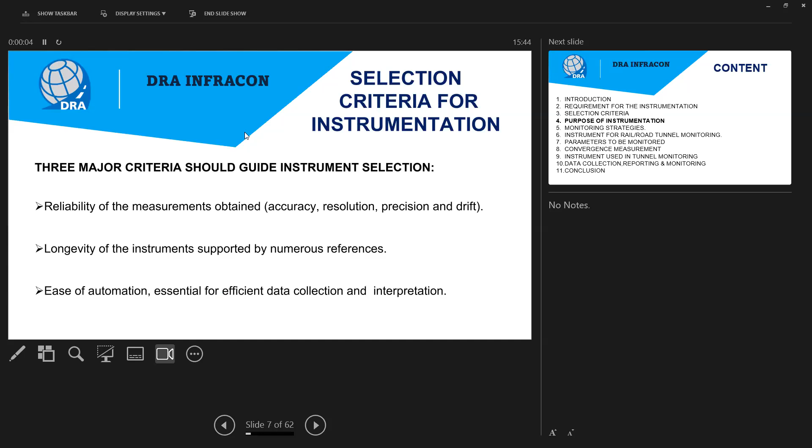So why do we require instrumentation, and where did we start with instrumentation? If you go to the earlier part of tunnel construction, there was very little instrumentation installed. As you are aware, before that, in India, as Madam said earlier, the transition point or watershed moment of tunnel construction, particularly in transport tunnels, was the construction of the Chenani Nashri Tunnel.

There were 3 projects awarded at a time in India, and these 3 were having almost the same length. The Chenani Nashri is 9.2 km, the Rohtang is about 8.9 km, and the Kazigund Banihal is around 8.5 km. All these 3 tunnels were awarded more or less in 2009-10, and the first tunnel completed was Chenani Nashri in 2017. Subsequently, Rohtang tunnel in 2021, and Kazigund Banihal in 2022.

When we started tunneling, there was a concept in the mind of planners that the tunnel is a very, very expensive and costly structure. At one point, the minister said during the breakthrough of the Chenani Nashri tunnel that at 200 crore per kilometer, you construct one kilometer of tunnel, but in 200 crore I can construct 10 kilometers of highway. So it's very expensive, the country would not afford it. But then I explained that the tunnel is a safe construction.

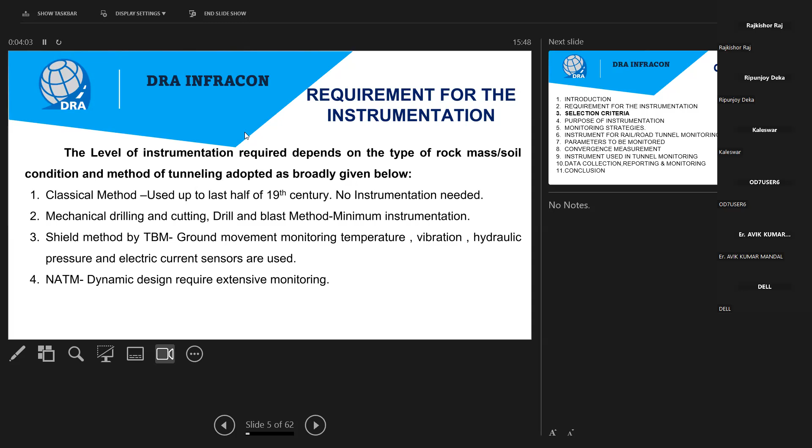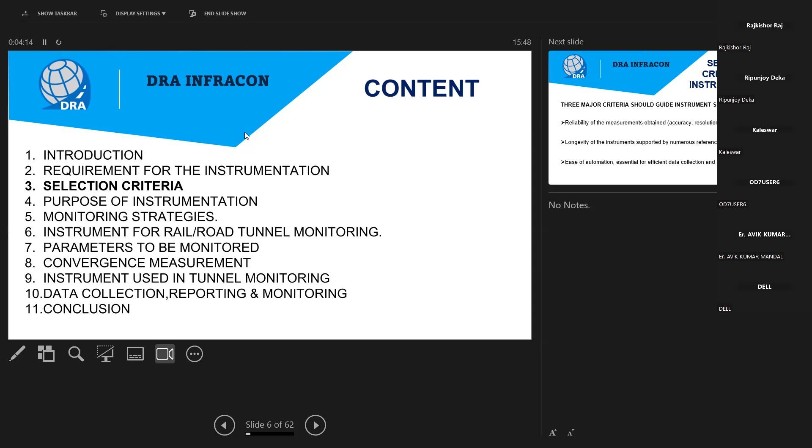Excuse me, sir, sorry to interrupt. Sir, am I audible? Sir, it's not in presenter view, can you switch to presenter view? The slides are also not moving. First right click on the screen, then slideshow, then right click again. Just a minute, the screen is not visible. What to do? It is in present mode. Yes sir, now right click on the screen. Yeah, hide presenter view, there's an option, hide presenter. Okay, oh now it's full screen? Yeah, now it's fully visible. Okay.

So, coming back to the discussion I was having about the watershed moment in India for tunneling. In 2017, the ministry started thinking about a lot of tunnels. Presently, almost 1,000 kilometers of tunneling is either under planning, implementation, or bidding. Now, tunneling is considered as usual construction, just like a flyover or an elevated corridor in road projects, particularly in road and railway projects.

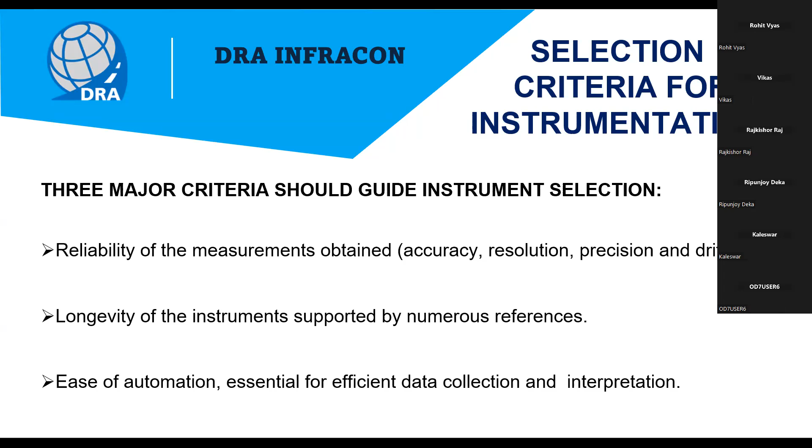As I said, automation is now becoming part and parcel of today's tunnel monitoring. Most tunnels in India now have inbuilt provisions in the contract for real-time monitoring on handheld devices, particularly mobile phones or laptops. What is the purpose of the instrumentation?

NATM design is a dynamic design process, wherein as you progress, you modify your design. As you see the tunnel, you improve your design based on certain criteria given by the designer, based on the ground support you are getting. Initially you just predict, but you correlate your prediction with actual ground reality, and accordingly manage your support system. Based on the support system, you also monitor the various stresses or convergences encountered in the tunnel while executing the underground structure.

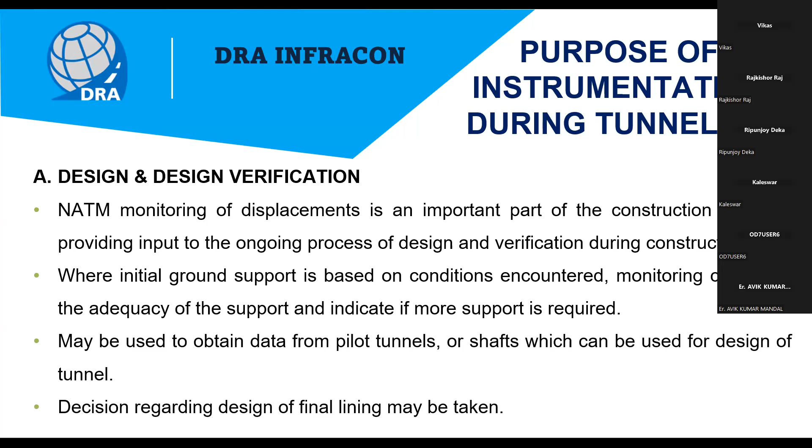So first is design verification. During construction, it helps you diagnose where your weaknesses are and where additional support is needed. We will subsequently see how we plot the monitoring or convergence data, and then see how we quickly correlate what is going to happen and how we control it.

A small monitoring failure can lead to a catastrophic event, just like we had some time ago in one of our projects in Uttarakhand, the Silkyara tunnel, wherein they were aware that the convergence limits were exceeding, but still they continued with the correction in the cross section, and it ultimately led to catastrophic failure.

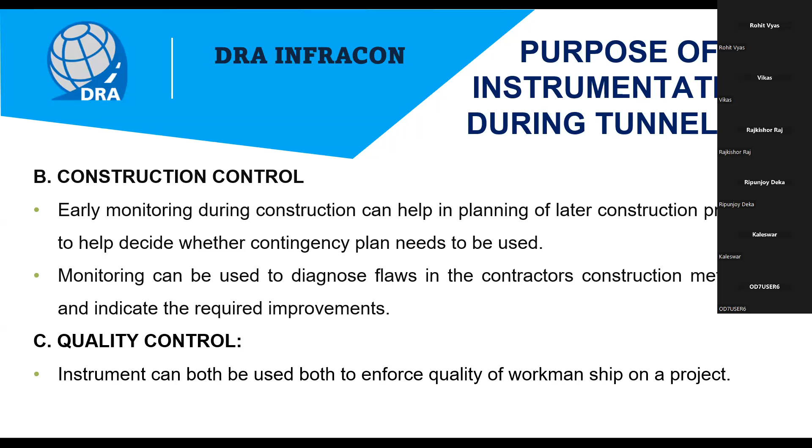People were trapped in the excavated tunnel. The other purpose of tunnel monitoring instrumentation is quality control, wherein you can assure that whatever rock bolts, shotcrete, or support system you have installed, or the lining or reinforcement, is according to requirement or not. So that quality control can also be taken care of. Safety, of course, as I said, is the main reason for providing more instrumentation in the tunnel.

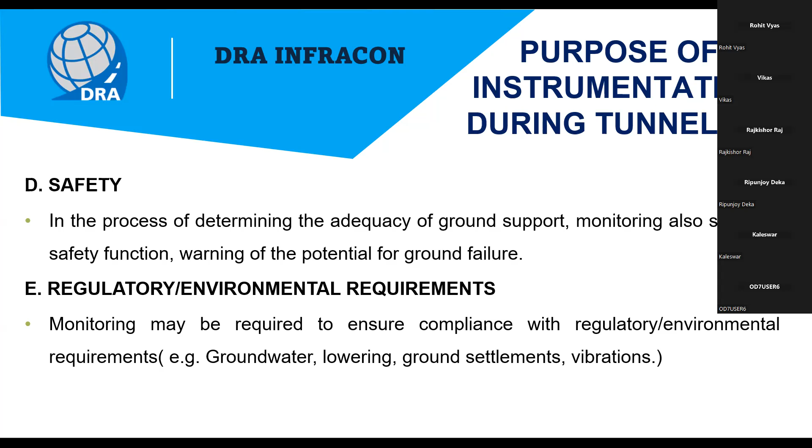Apart from that, there are regulatory requirements. In many projects where there was low cover and a population sitting at the top of the hill, when the tunneling agency was executing the work, they started reporting challenges, cracks in their buildings, and other problems. Their animals were scared. So in that case, regulatory authorities now make it compulsory that wherever there is urban population at the top, you have to have certain instrumentation, particularly measuring deflection or vibration at the top of the hill.

Now, performance: whatever you are doing, whether it is performing as per expectation or not. You install the instrumentation, record it, and check whether the support system you have provided is sufficient or not, or whatever corrective measures are to be taken.

As I said, legal protection: in one of the projects we had the data, and we made it available to the honorable court, showing that the cracks at the top of the tunnel were not because of failure of the slopes, but because of other reasons. We gave them the data; we had installed inclinometers and such at the slope of the open cut.

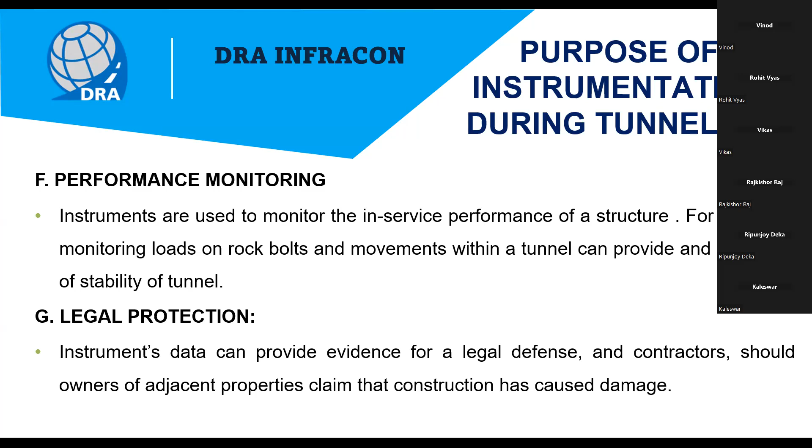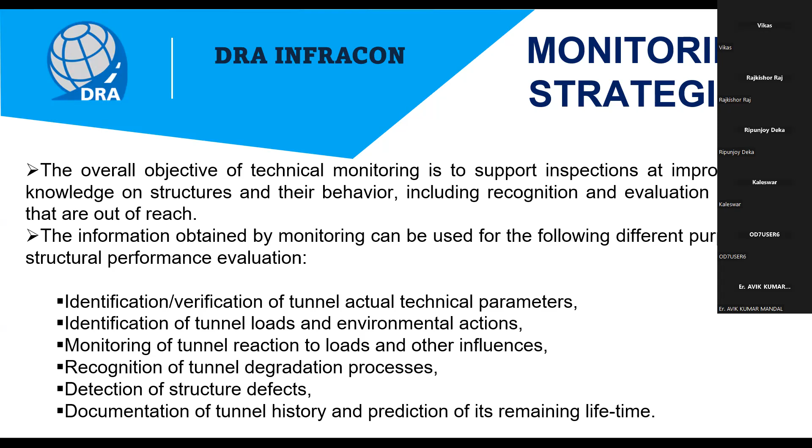Unfortunately, another issue I am pursuing with the government on various platforms is that we do not keep a repository for every tunnel. If we had the repository of the tunnel, we would probably not require much investigation if constructing any tunnel parallel to that or any tunnel in that region. For example, we requested the government to create a repository for the Chenani Nashri tunnel. They did not create it, and that data is available only in hard copies at the project site. Now they have invited a parallel tunnel to the Chenani Nashri tunnel, and while inviting that, they appointed a new consultant who carried out all the pre-bid investigations. The government unnecessarily spent a lot, and still he is predicting something that could have easily been assessed from what was encountered in the past in the previous tunnel excavation.

So that's the thing. Now, what are the typical instrumentation schemes of a NATM tunnel? We will talk about NATM tunnels more largely. My experience is basically in NATM tunnels in the Himalaya as well as non-Himalaya regions, so I'll talk more about NATM and whatever equipment is required for NATM tunnels.

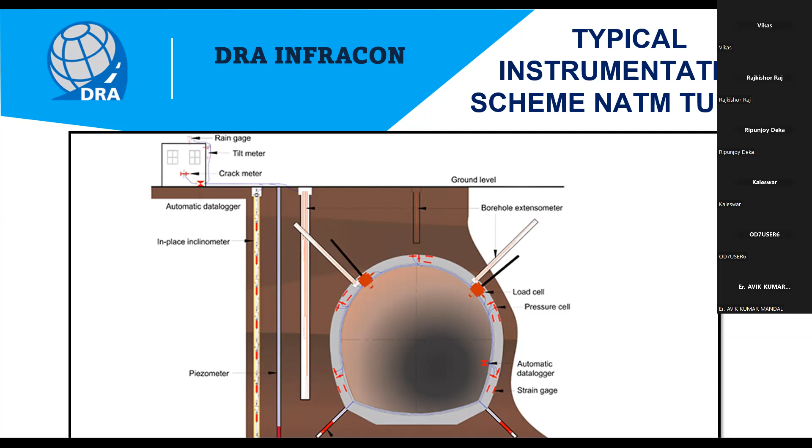So this is a typical diagram showing most of the equipment that is used to be installed in the tunnel. We'll talk one by one about the tunnel instrumentation.

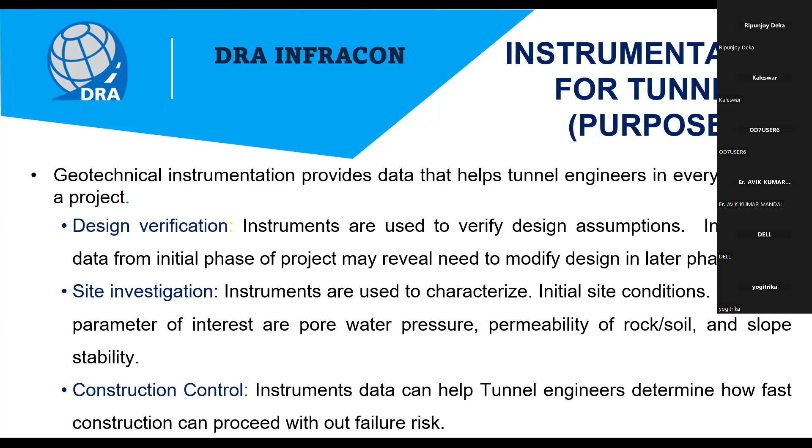Construction control, of course, is the basic purpose.

Now, what are the different components that need to be monitored for an underground structure? First is the portal, whether it's the portal of the adit or the main underground structure. Portal is the outside portion, the slope cut portion, the open cut portion. So that is the first thing we used to monitor. In India, based on my experience and the number of failures I have evaluated out of my inquisitiveness to know about the failures, more or less 70 to 80% of failures in tunnels are at the portal itself. It is the most ignored part of tunnel engineering, and at portals generally people used to install as little instrumentation as possible. But these days, wherever I'm constructing a tunnel, I'm putting maximum instrumentation on the tunnel portals.

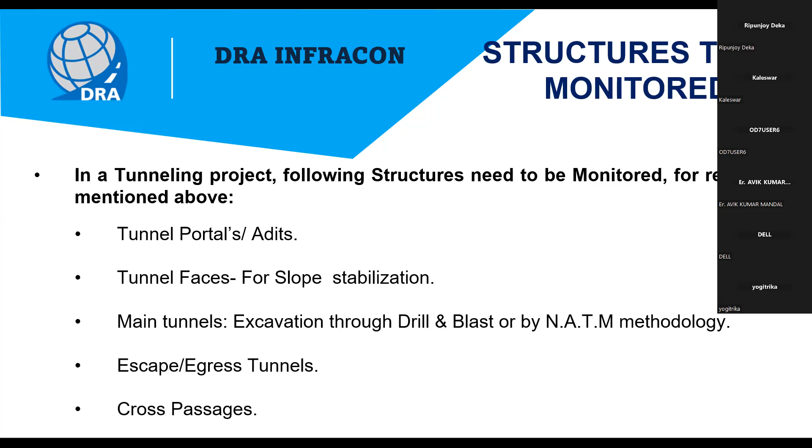Second, we used to monitor the face. The slope stabilization techniques are to be decided based on the instrumentation done on the face. Next, the tunnel needs to be monitored longitudinally as well as along the cross section, and different instrumentation is required particularly in the main tunnel section, and then the escape egress tunnel, and of course the cross passages.

Closure or convergence is a very important parameter, because NATM is a progress-based tunneling design method wherein you anticipate the least support and then subsequently allow some convergence, and thereafter, based on the convergence data, you improve upon or increase the support to restrict the convergence.

Similarly, rock ground pressure on the support, whatever pressure is coming, requires instrumentation to measure it. Also, radial movement of the rocks within the tunnel or outside the tunnel around the support.

Pore water pressure is important because we've seen many failures, particularly the classical failure of the Rohtang tunnel, wherein Seri Nala could not be properly judged, and there was a puncture in the aquifer with lot of water ingress in the tunnel, and the tunnel remained closed for more than a year and a half.

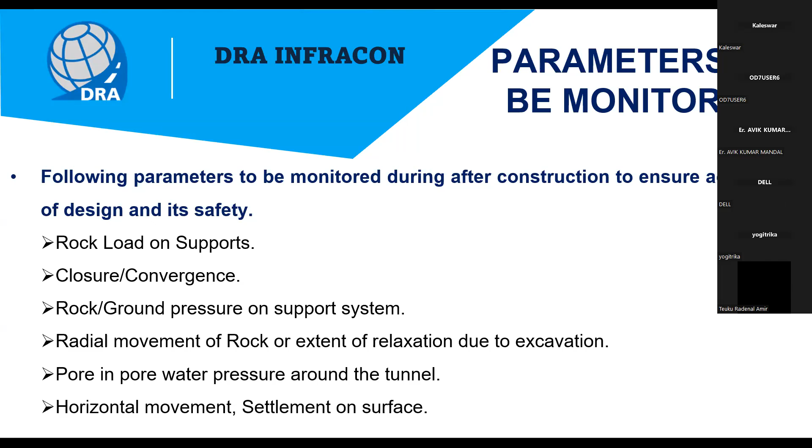So pore water pressure needs to be monitored, and then horizontal movement of the tunnel or the settlement of the support.

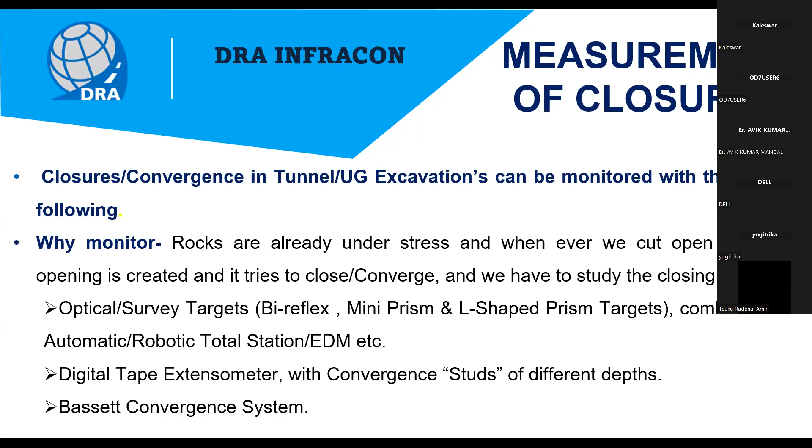Now we'll go through how the convergence is measured and how it is represented, why to monitor it, and what are the instrumentations involved - we'll see one by one.

The convergence measurement is carried out with the help of targets. Targets are simply a prismatic or non-prismatic bi-reflex type target, mounted on the surface of the tunnel or on the slope of the open excavation, berms or benches, or the face of the rock, wherever you see open rocks. You mount these targets, record the readings, and by combining individual targets, you determine how the convergence profile is changing outside as well as inside the tunnel.

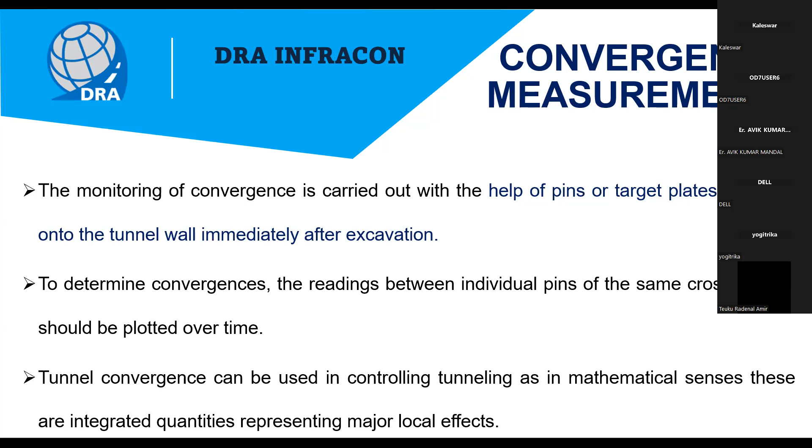Both you plot longitudinally as well as along the circumference or periphery of the tunnel. Stress-strain curvatures differential with respect to time are also noted.

The convergence calculation is simple: C(t) equals D0 minus D(t). The reading noted initially while installing the support, and the reading noted at any given point of time - the difference of that is convergence, and this convergence may be negative or positive.

Positive is always dangerous because it is coming inside. Negative you may sometimes ignore, but you can't ignore it completely.

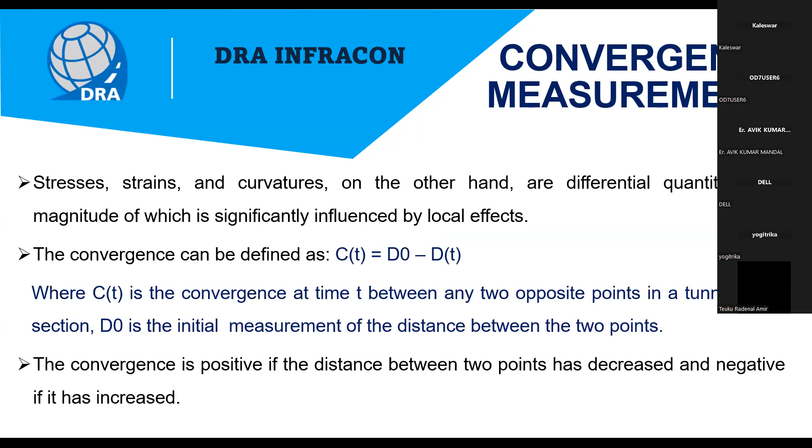Now, displacement history means you monitor over a longer period of time and then plot it. It is not necessary that whatever convergence you are seeing will remain short term - for many other reasons, this convergence at a given point of time may suddenly change.

So monitoring should not stop once you have gone ahead of the tunnel. The classical example is the Silkyara tunnel, wherein the accident happened at a place about 2 kilometers ahead of that particular location.

If the monitoring had continued, probably they would have noticed that there is a major change in the behavior of the convergence, and they could have immediately taken preventive action.

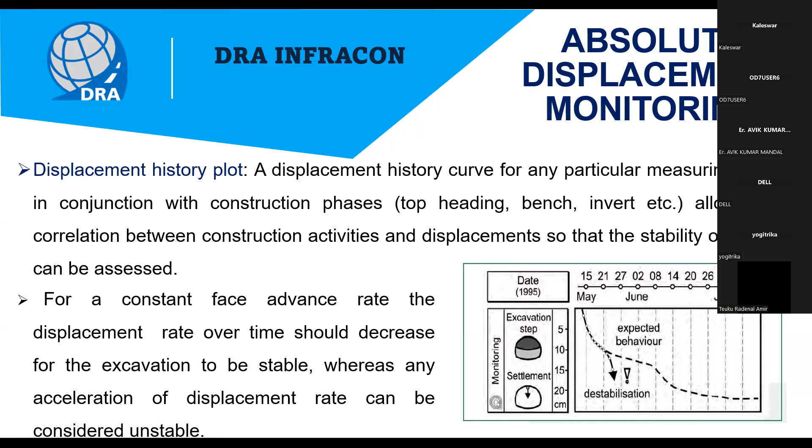So over a period of time there is monitoring, and along the length of the tunnel, we should also plot how the behavior is changing.

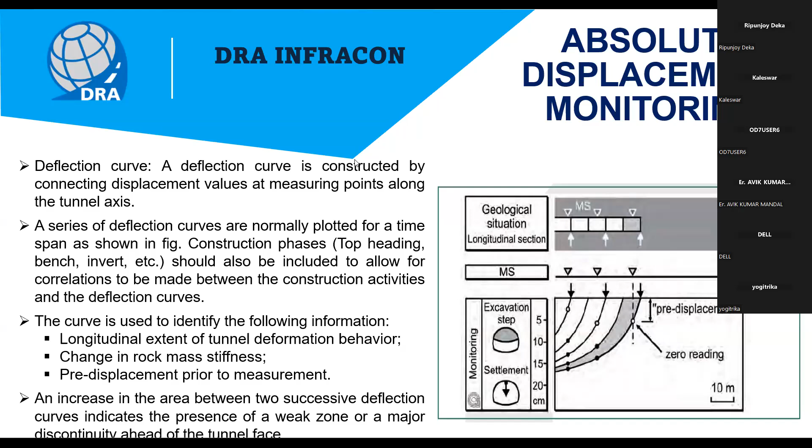For example, you are moving in this direction, but you keep on monitoring at each and every location and then plot it. Now why it is zero reading, because initial displacement is allowed and that is to be ignored.

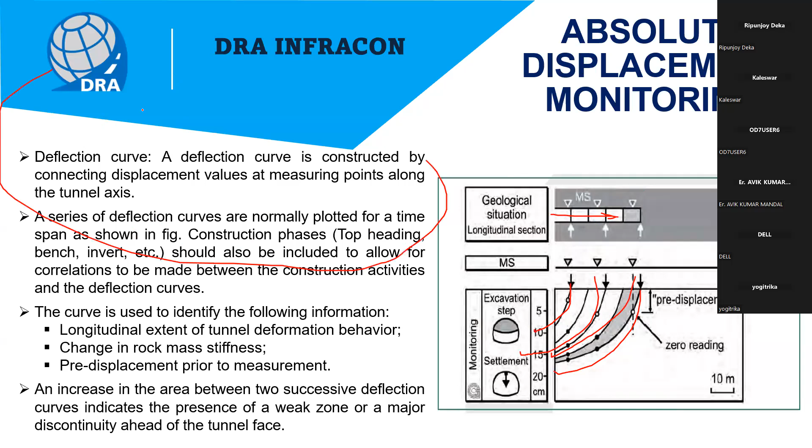So over a period of time along the length, if you measure it and plot it, you will be able to know the longitudinal deformation behavior of the tunnel, how the rock mass stiffness is changing over time, and how pre-displacement measurement prior to support is to be taken care of. This is a very important parameter that needs to be plotted, particularly the deflection curve.

Now, if this deflection curve is plotted with respect to time also, then you will be able to know what kind of geological changes are happening in the tunnel.

For example, if you see a uniform deflection in the tunnel, and suddenly there is an increase in the deflection and it goes back, it means some geological formation or weak strata has been encountered in between your tunnel, which requires additional monitoring.

If you plot it over a period of time and draw the trend curve, then you will be able to know that there is a weak zone and we should take care of that beforehand.

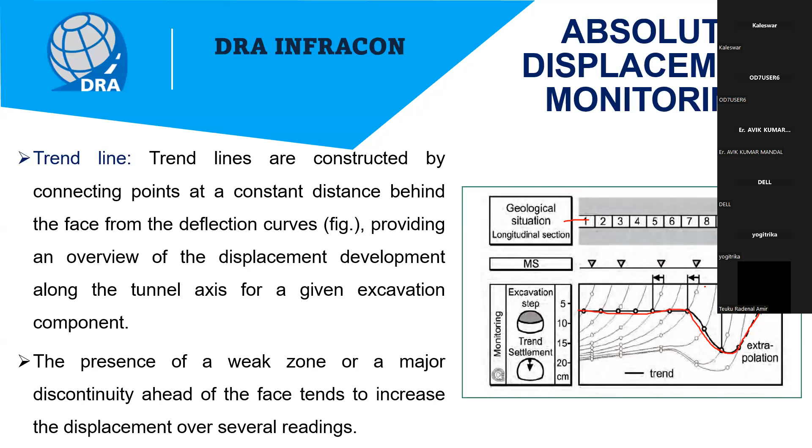Now, frequency of reading - whether we should take it daily, weekly or monthly - depends on the type of strata you are encountering. Otherwise, these days we have general instruments which we put inside the tunnel that take readings on a real-time basis, but it is not necessary that you install that all along.

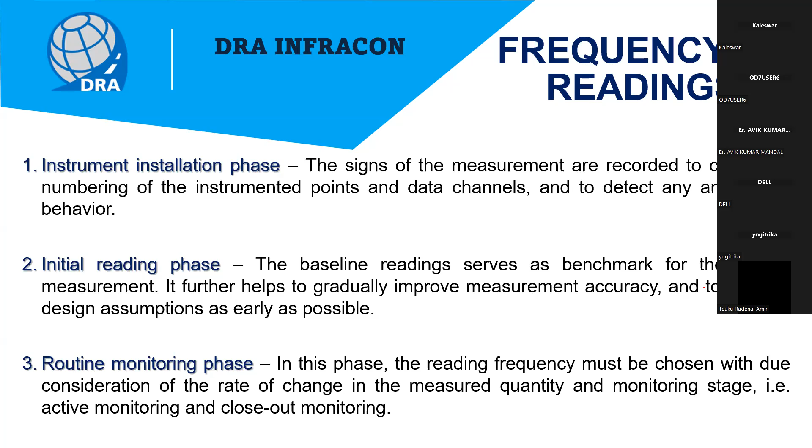So you are still dependent on the optical targets, wherein manual reading is required to be taken, and in that case, the readings are spanned over time.

So I have just drawn various types of instrumentation, along with whether we should take readings on daily basis or at a desired frequency. This frequency depends on many factors, whether you are encountering displacement continuously, the type of strata, or at the time of excavation you got a soft rock, or you have a particular kind of dip or certain geological formation. It all depends on that.

But if you monitor it, it is compulsory to monitor visual observation, displacement, stress, settlement, or the cracks on a daily basis in the entire length. Whether you have constructed a 3 km length, start daily basis from the beginning itself to the end.

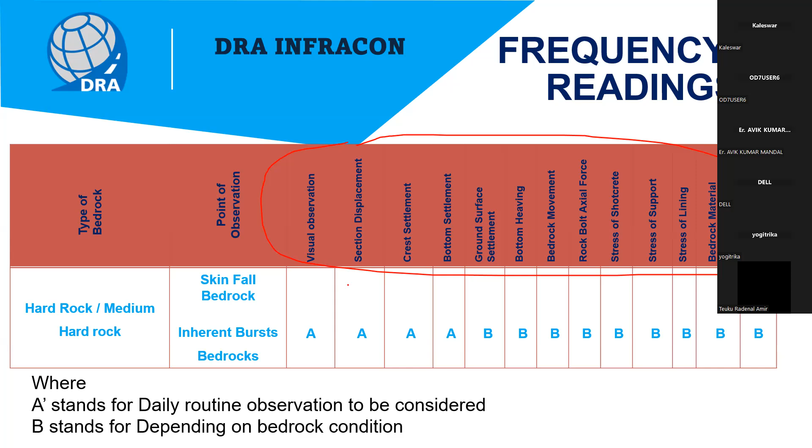Load cells, rock bolt load cells, convergence meter, and the typical earth pressure cells are required in most of the tunnels, along with the prism and the total station.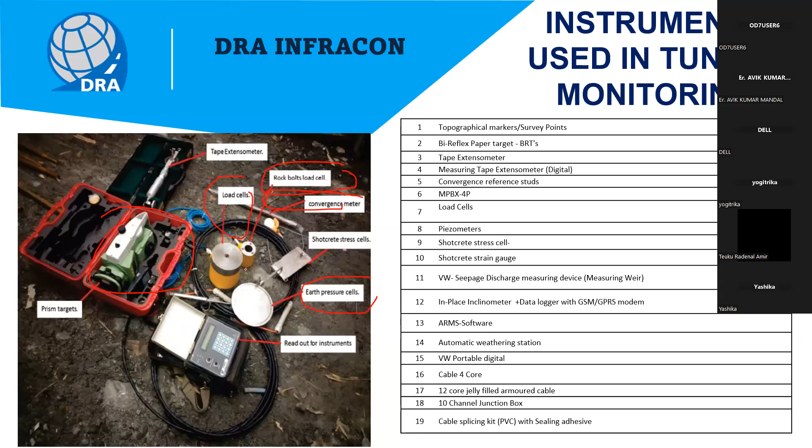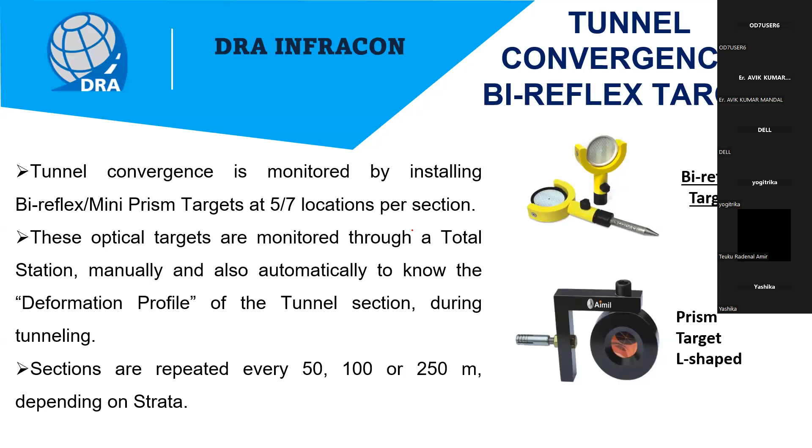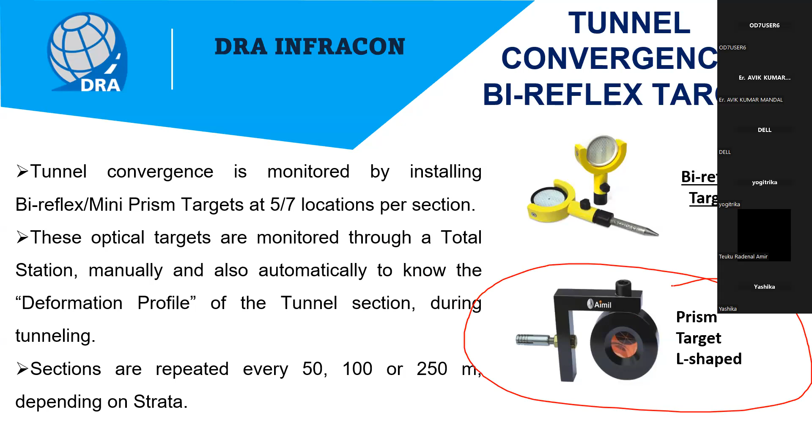So the first and foremost, which is most common, is bireflex targets, which is required in most tunnels. It is along the periphery, maybe at 3 location, 5 location, 7 location, depending on the field engineer who is monitoring the tunnel, depending on the rock class, whether you are providing 5 or 7 or 10. In that category, wherever you need some specialized or cautionary monitoring, or wherever you require intensive monitoring, you provide more specific prismatic type of targets. Very simple. Whether you install 3 or 4 or more number of instrumentation targets, both in heading and benching separately, or heading and benching to a full face together, that depends.

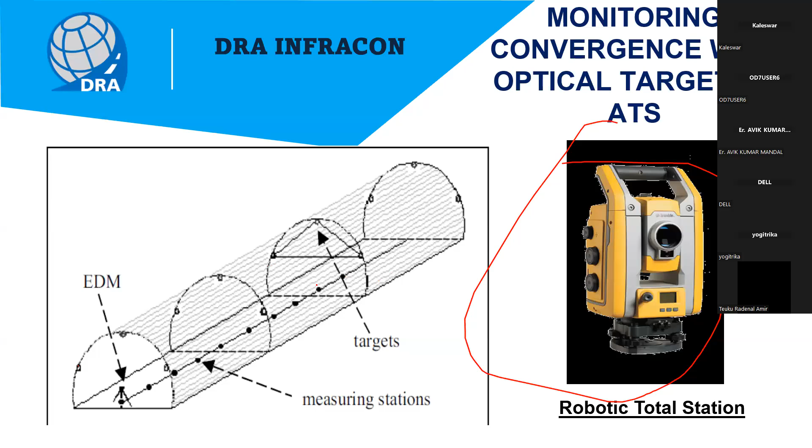And apart from the target, you require a total station and a skilled surveyor who monitors it, and the precision level of these robotic total stations should be very high. Accordingly, you require a very skilled surveyor to monitor all these, to record all the data. And then you present the data in various forms for the different targets, as well as all targets put together in a cumulative way.

So these are the, and there are a lot of softwares which are available these days to plot the target data.

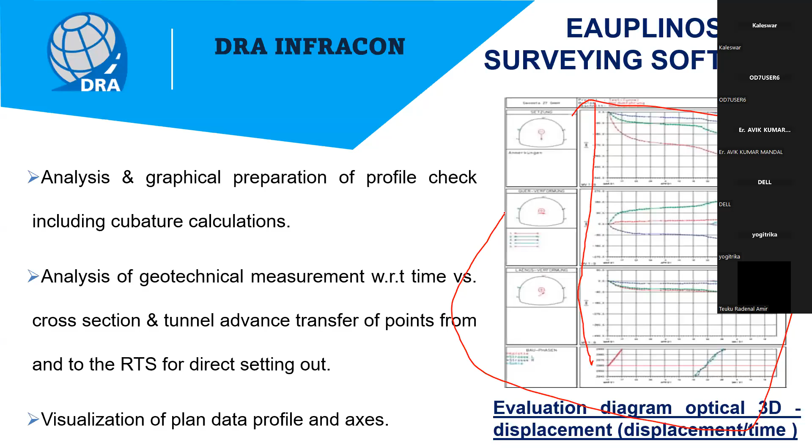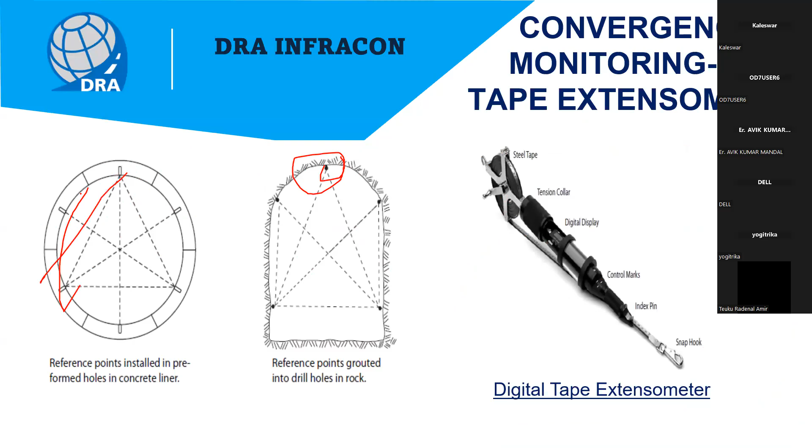Then you come to the next, there is another way to monitor the convergence, which is also very precise. You install the specific points, and then you place the digital tape extensometer all along the periphery in this direction, and then you record what is the change in the reading.

This is another method, the Basett system, wherein you install it in a completed tunnel. Then you measure the spatial data all along the periphery in both X direction as well as Y direction. The entire data that is changing, it is taking place over a period of time.

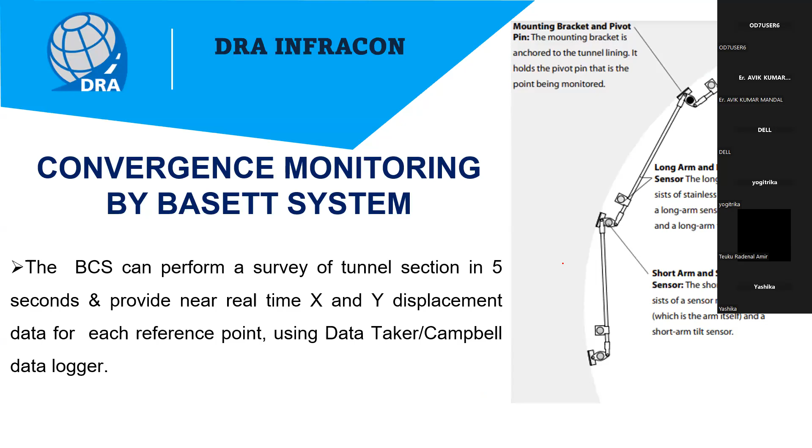And sensors are installed. These are the sensors which are installed. So these sensors record the readings.

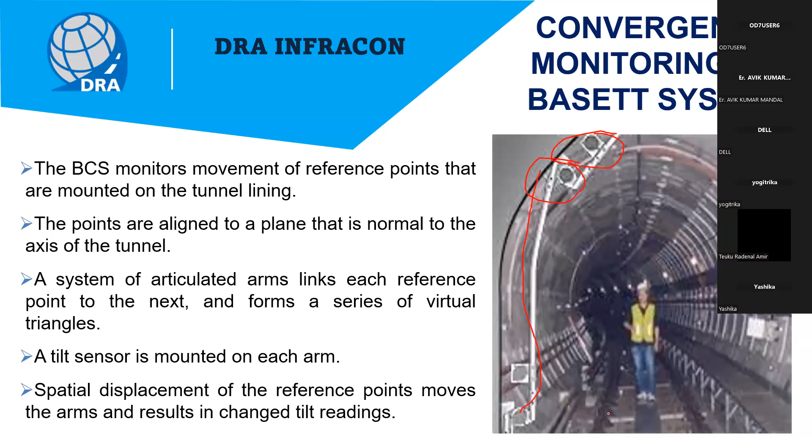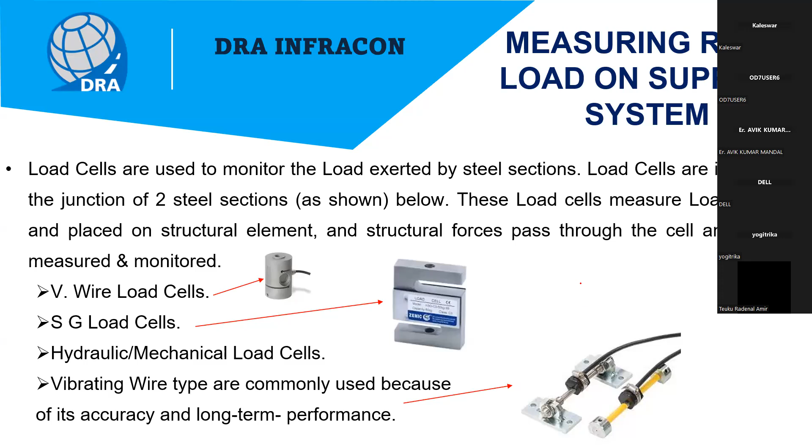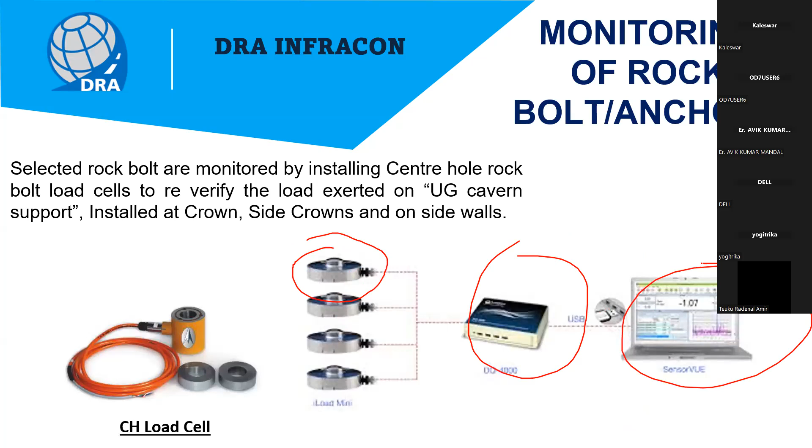Now, there is a type of load cell which is CH type, where you are getting the reading directly on the rock bolt. You install it and then take the reading on the rock bolt. It goes to the handheld reader and then you can plot it on the laptop through a software. Generally, software is provided by the people who are manufacturing the load cells.

Now, another important aspect is measuring the pressure which is coming on the support system, whether shotcrete or in the lining, whatever be the pressure that is coming up, whether it is sustainable or not sustainable. So you provide the radial and tangential stress meters.

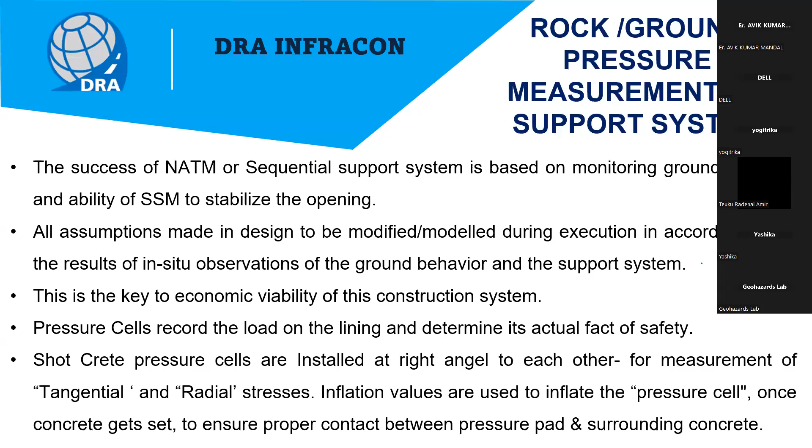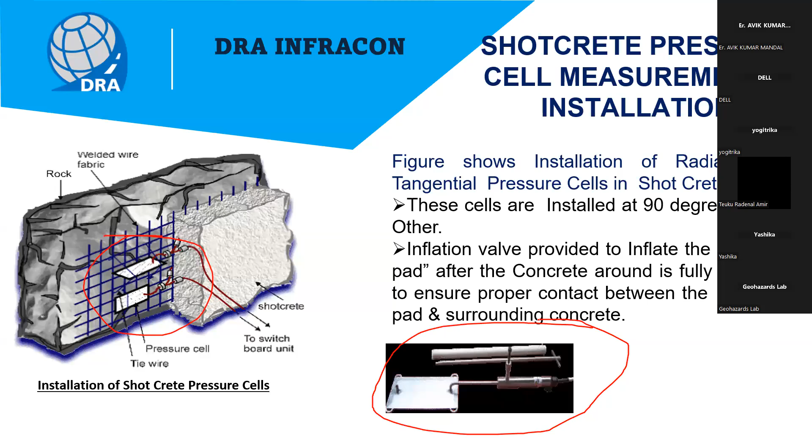These are the radial and tangential stress gauges that have been provided. It looks like this, and accordingly you take the readings and decide whether the shotcrete thickness is sufficient, whether the designs done are adequate, and optimize accordingly. If there is no pressure coming and you are provided 250mm shotcrete, you can reduce it, or if you are provided 2 layers of wire mesh, you can change that - take corrective action and optimize your design based on these readings.

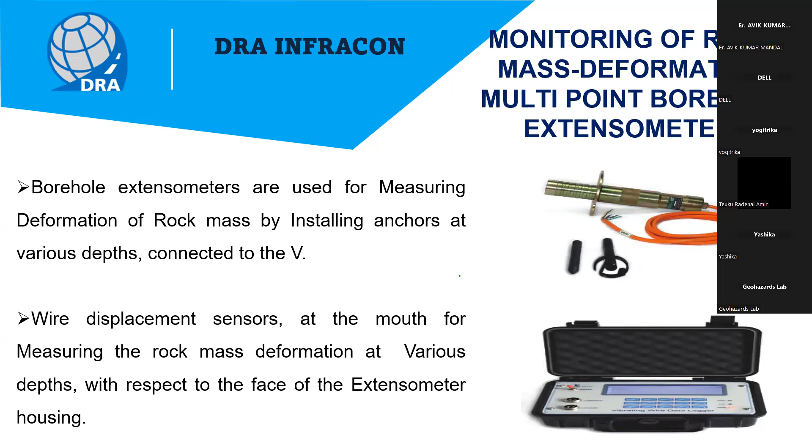So it's quite helpful. Then comes rock mass monitoring. First we saw how rock bolt stresses are monitored, then how support, particularly layered support systems, are taken care of. Now, whatever rock you are encountering, how the rock along its periphery is taking care of the load - that is to be monitored.

Then next is pore water pressure. Same way as you install the load cell, like this hard rock, soft rock monitoring system is installed. Same way you can install the vibrating piezometer to take care of water pressure coming on the ground or inside the rock surrounding your tunnel.

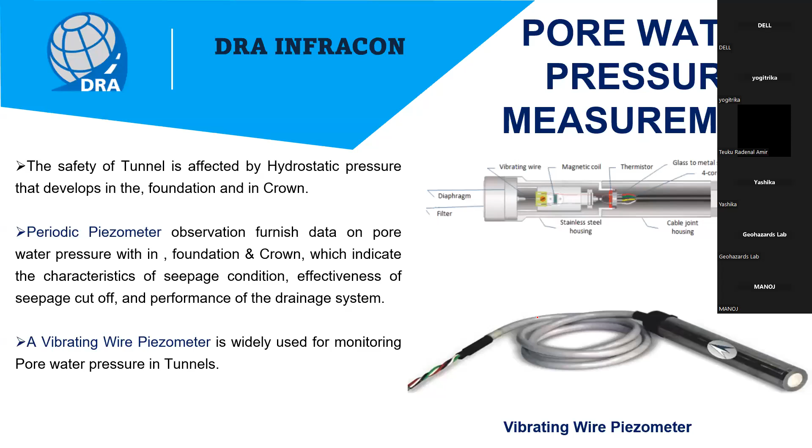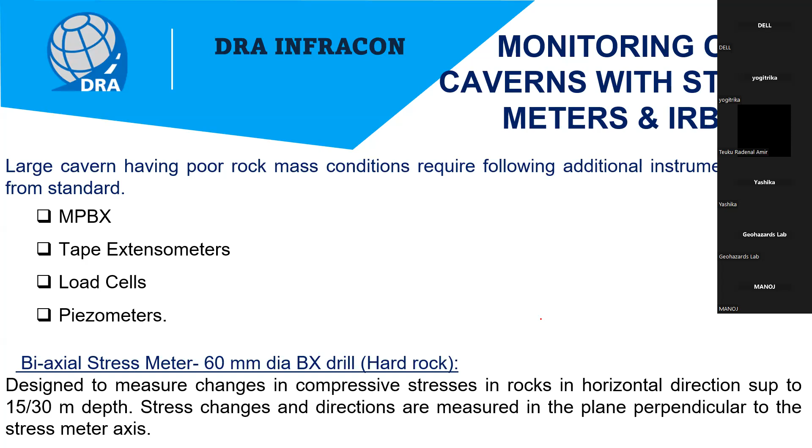Biaxial stress meters are installed for different types of rocks, whether soft or hard, to measure the variations coming in the rock system, or the stress changes in the rock system beyond the tunnel. These systems are also installed to check large caverns - particularly how the rock mass inside and beyond the cavern is behaving, and what stresses are coming, so that you can monitor how it is taking care of it.

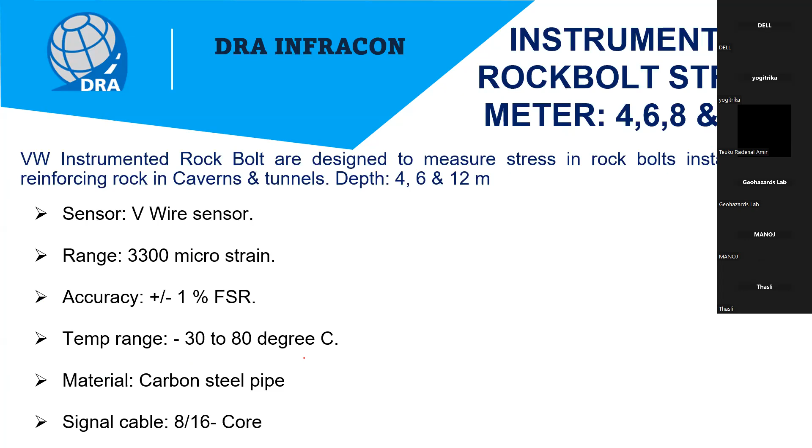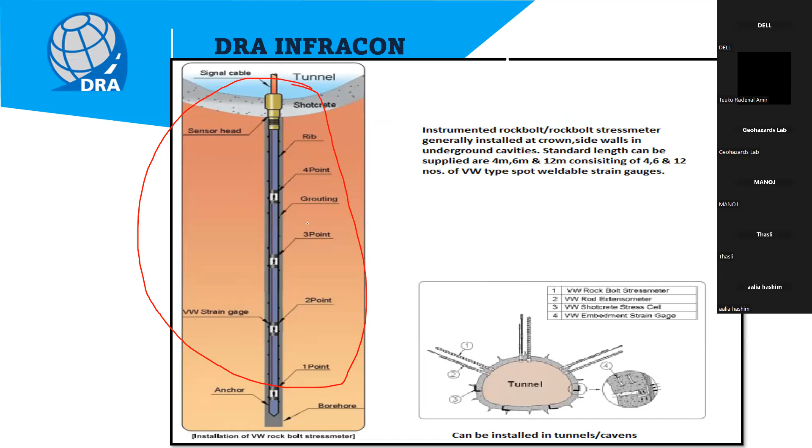Similarly, the different sizes and depths are to be determined based on the type of rock. This is one of the instrumentations installed to check the stresses inside the rock - a multi-point stress gauge which measures it. It depends on the type of rock you are encountering, what readings you want, and how long you want to monitor it.

Particularly, this is applicable in case of docks where you are constructing a lot of dockyards, underground dockyards - like one dockyard constructed in the eastern part of the country on a coast. I have visited that place where there is a submarine dockyard, and this instrumentation is done in an extensive way there.

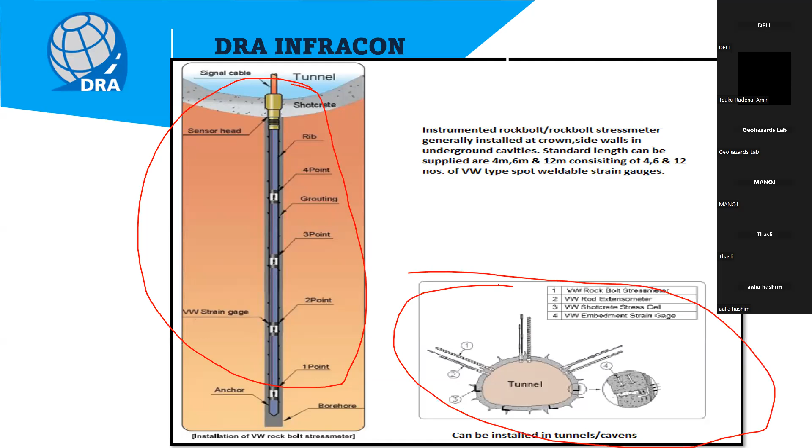Then the next part is data recording during construction as well as post construction. This is a handheld readout device, and a cable is installed, and the data is taken into this, which is then converted into a readable format or interpreted through a PC or laptop.

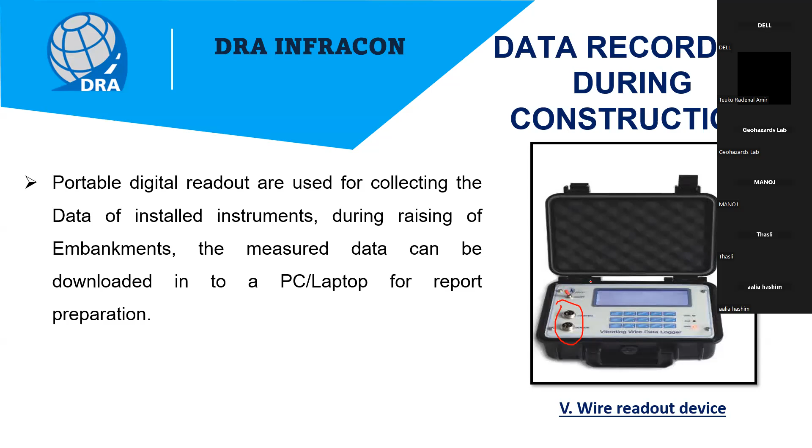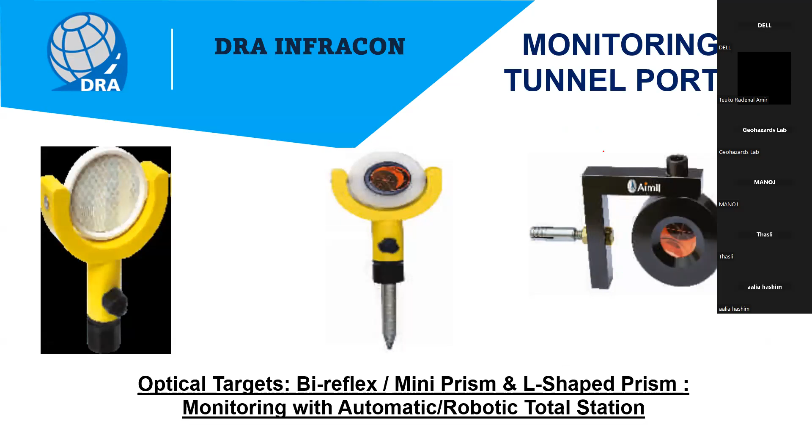This is the monitoring of the tunnel portal. As I said, first we went through underground tunneling, then we considered large cavern structures, and then slopes. In slopes, generally you provide reflex targets, then you provide the inclinometer or extensometer. This is the extensometer, inclinometer, and then multi-point borehole extensometer - MPBX - installed at different heights.

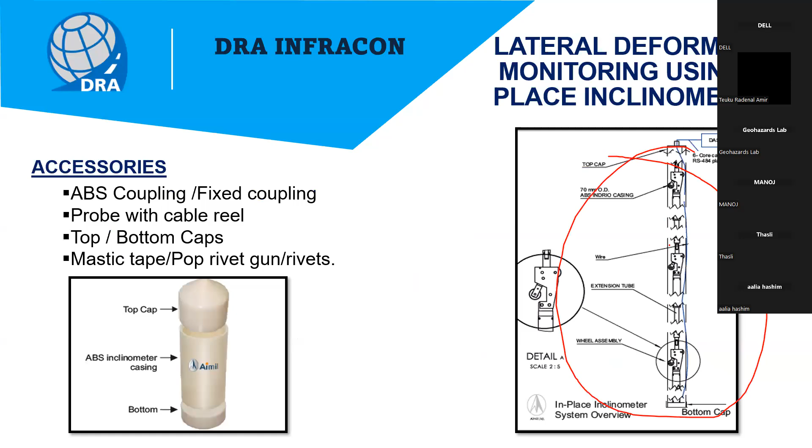Take care of that. Then the next part is data collection and reporting. It's very important - it is easy to collect the data, but the data collected has to be reported and interpreted properly, and accordingly monitored over a longer period of time.

These days a lot of softwares are readily available in the market wherein data management can be done very effectively. In many tunnel projects, particularly RVNL railway projects, they are now making it compulsory for contractors to buy a platform wherein data can be recorded and interpreted over a long period of time.

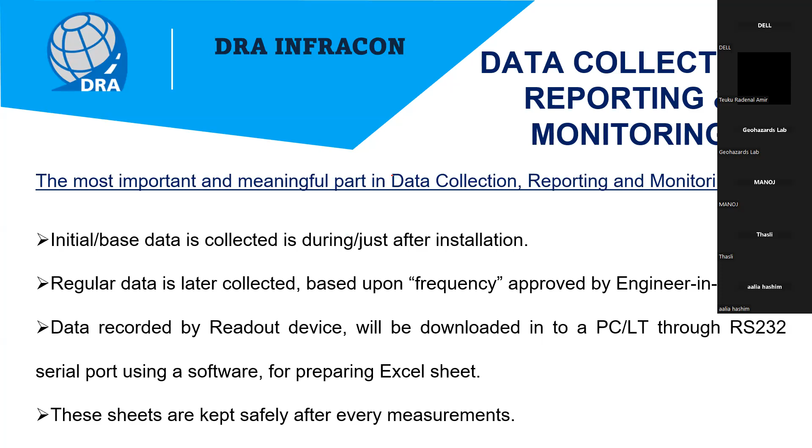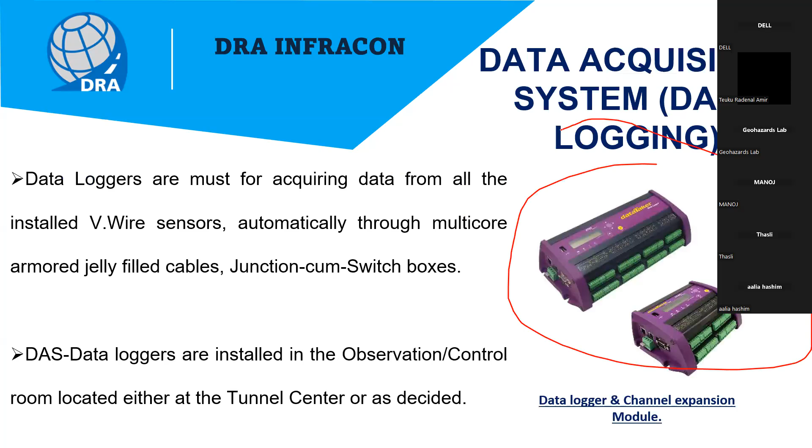So this is the data acquisition, data logger channel expansion module, wherein the entire data is kept and stored. And this is the database. There are softwares available wherein you can download the app on your mobile or put it on the laptop and monitor the data.

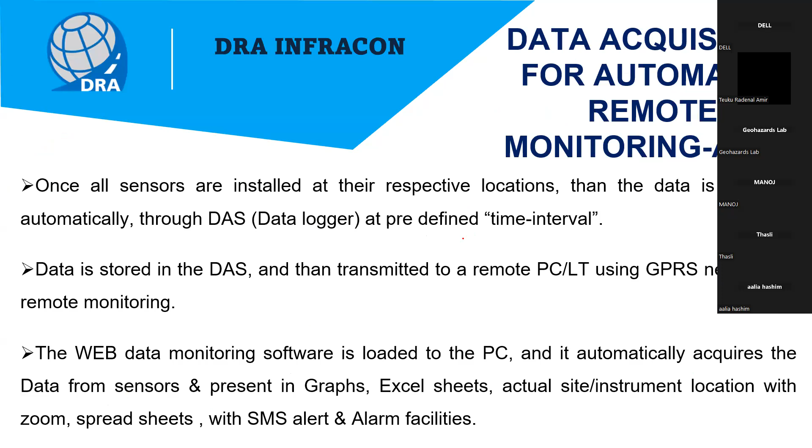ARMS is one of the software, which is a web-based application. Now, apart from that, if the data is available, particularly for analysts and researchers, numerical modeling can be done very easily with the kind of instrumentation we receive.

Now, most tunnels, apart from the data manually recorded, these days the authorities are making it compulsory that this data be made available online all the time and to everyone, so that one can easily evaluate how the future tunneling scenario will be.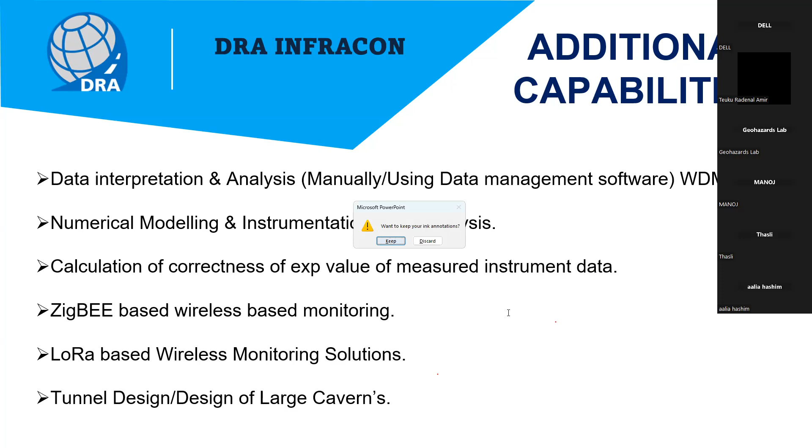And finally, conclusion.

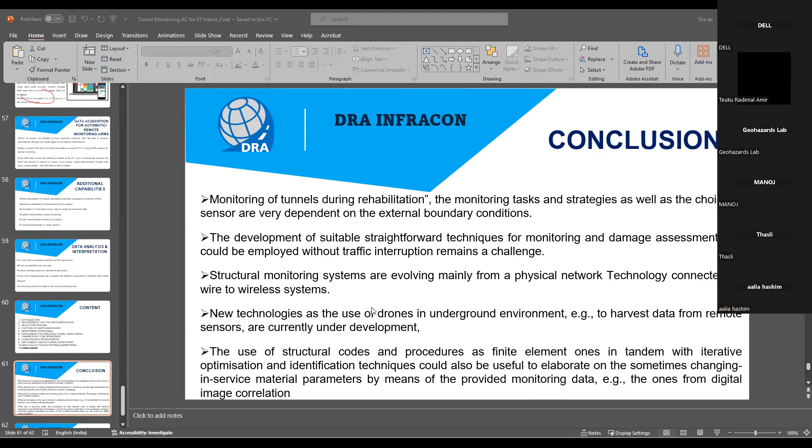So in tunneling, first of all, monitoring is there - there is no choice. There should not be any choice regarding monitoring in the tunnel. That's very clear. This is the first thing which has to be done on any tunnel or underground project. Now, there should be a simple and easy mechanism to have monitoring in the tunnel.

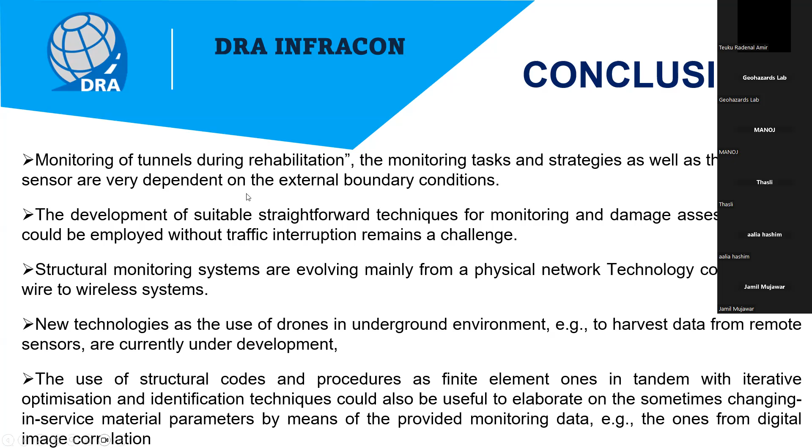That's all. I conclude my talk here.

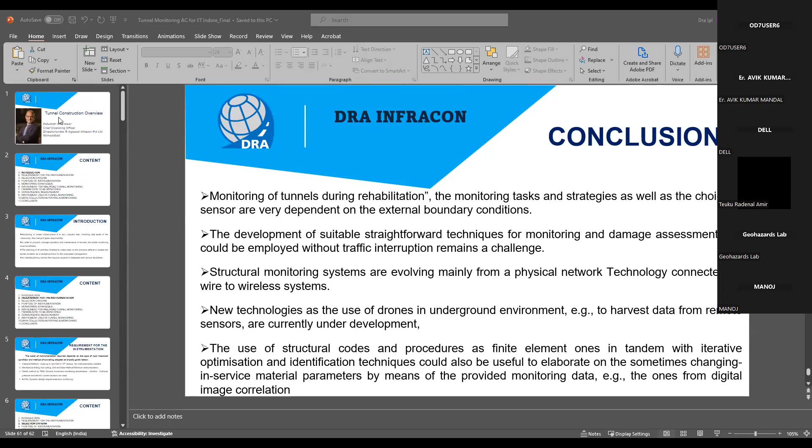So, as per your vast experience in this underground construction, do you have any checklist or manual? Because underground structural prediction is very, very difficult - we need the expertise of geophysics, geologists, geotechnical investigation, underground water, and unforeseen conditions. So based on your long experience, do you have checklists of the important things you need to undergo before deciding the alignment and the type of construction?

Right sir, as far as my experience is concerned, honestly I have yet to find a tunnel wherein all the geophysical, geotechnical, and geological investigations were completed before the award or commencement of the project. There are very few. Now there is a limitation of geological, geotechnical, or geophysical investigation - if you have a cover of more than 1,000 meters, what will you do? How will you assess that?

That's also a limitation. Having said so, before the start of the project, most builders or developers are doing extensive investigations and adopting accordingly. They are not relying on data provided at the time of project preparation - they themselves are investigating, re-investigating, and ensuring their mobilization accordingly. But yes, no one can ensure, and there is no shortcut to investigation also.